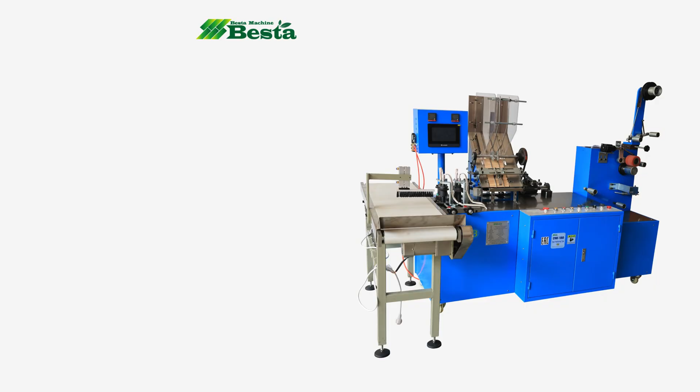We wish to introduce you our latest coffee stirring stick packing machine. For this packing machine, it is cursor positioning type. It is positioning according to the cursor point and then does the cutting.

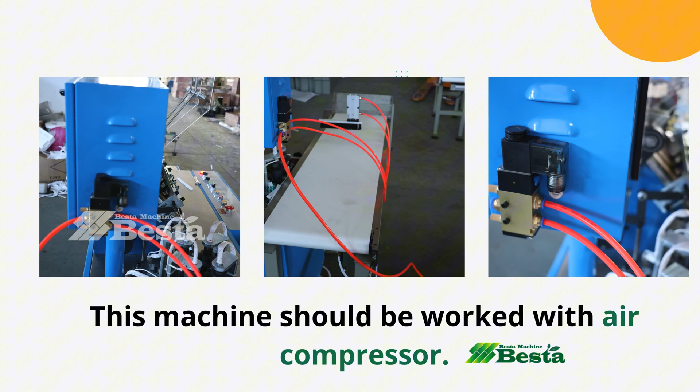It can meet different sizes of the product packing. This machine should be worked with an air compressor. This is the heating area. This is the coffee stirring stick loading area.

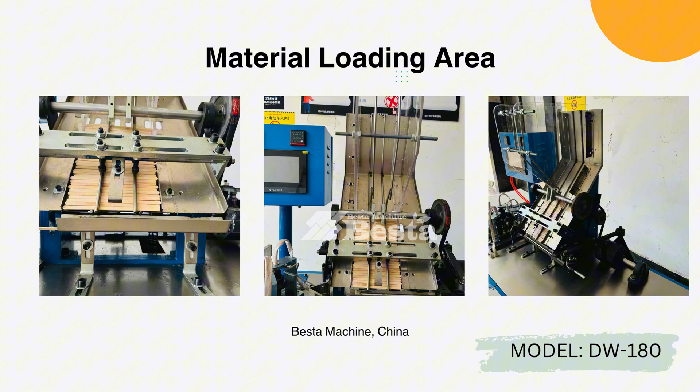You can set the packing length on the screen. This is the temperature controller.

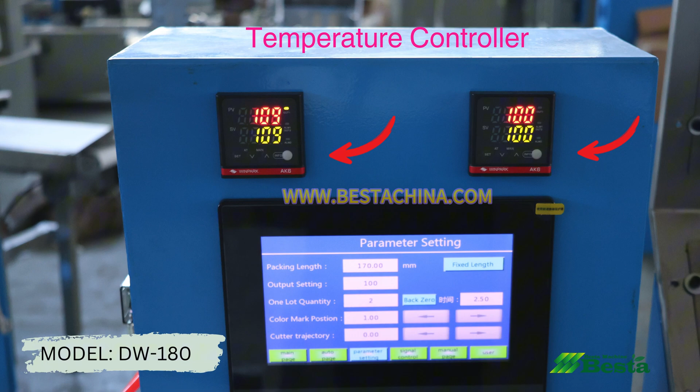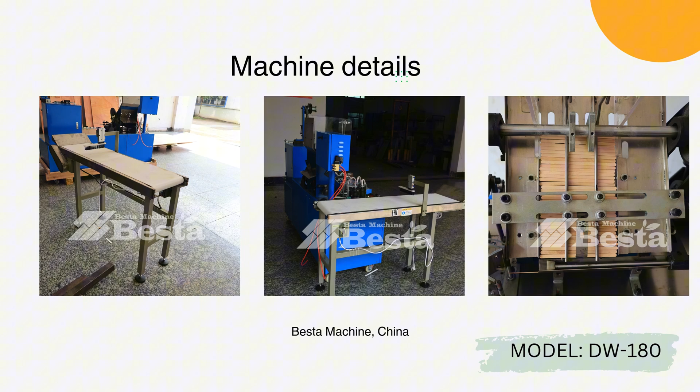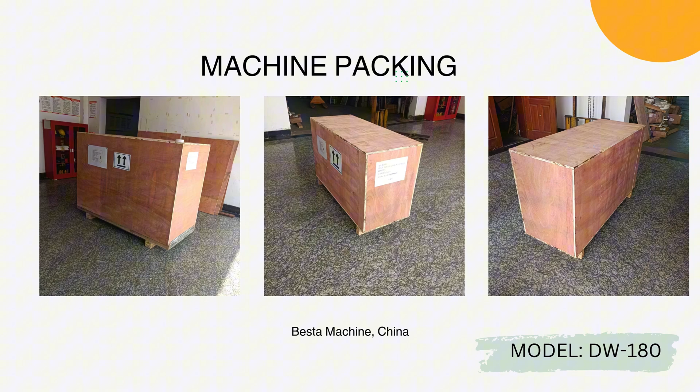This is our machine packing photo. After packing...

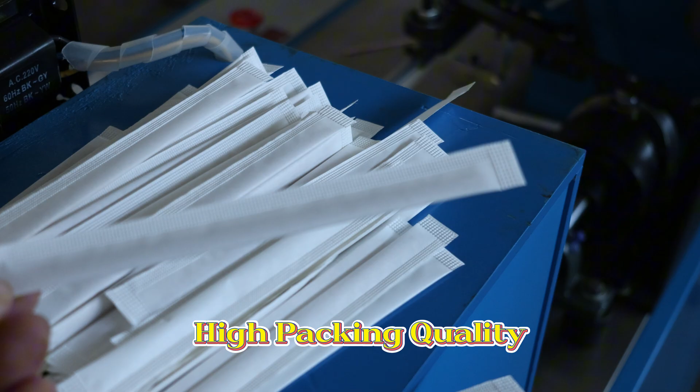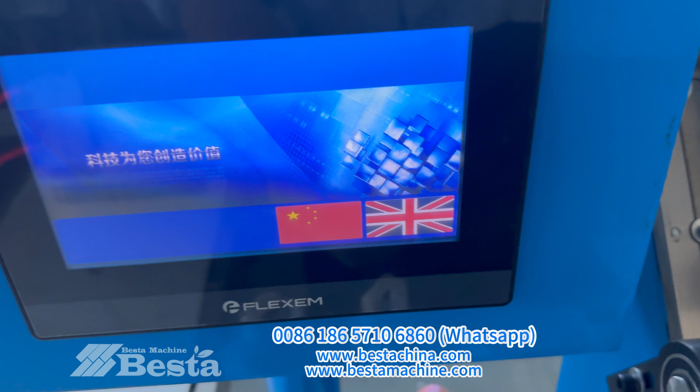Okay, after you started the LCD, you can shift into the English version and also press parameter setting.

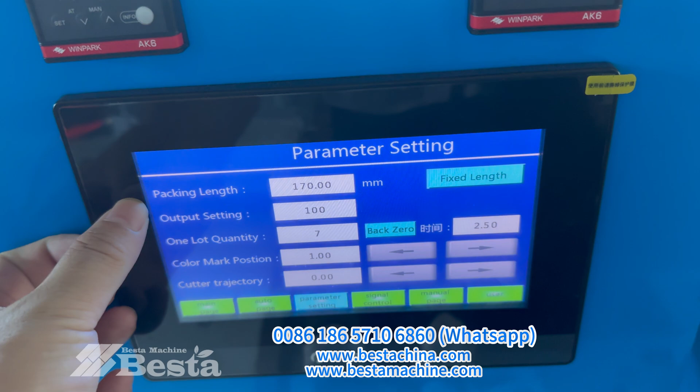This packing length is set according to your product length. If you will pack 180, you also need to reset the packing length here.

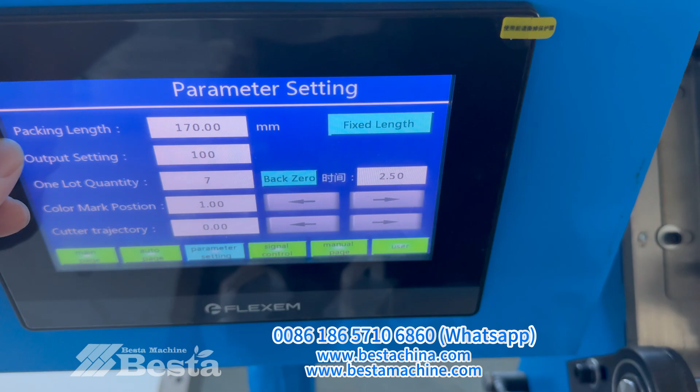For this packing machine, it has two working modes. Type 1: set the packing length according to the product length. You can do the setting by yourself. Type 2: it is by cursor positioning mode.

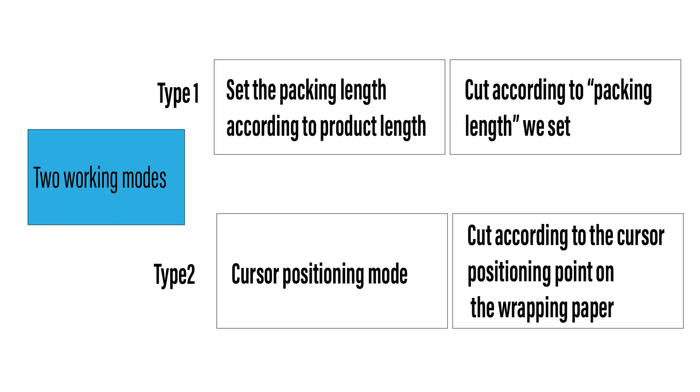It is cut according to the cursor positioning point on the packing paper. Type 1, set according to the product length. For the coffee stirring stick, the product length is 140 mm.

The packing length we can set according to what we need, for example 170 mm or 175 mm. We can do the packing length setting on the screen.

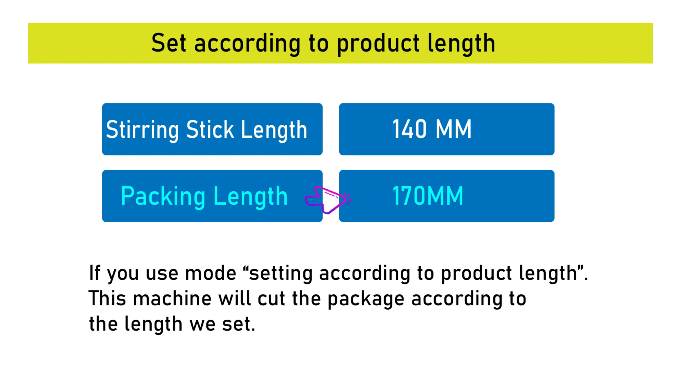Another mode is the cursor positioning mode. For the packing paper itself, it should have a cursor positioning point. It will remind the machine to do the cutting according to the cursor positioning point. It is easy for the machine to distinguish the cutting place.